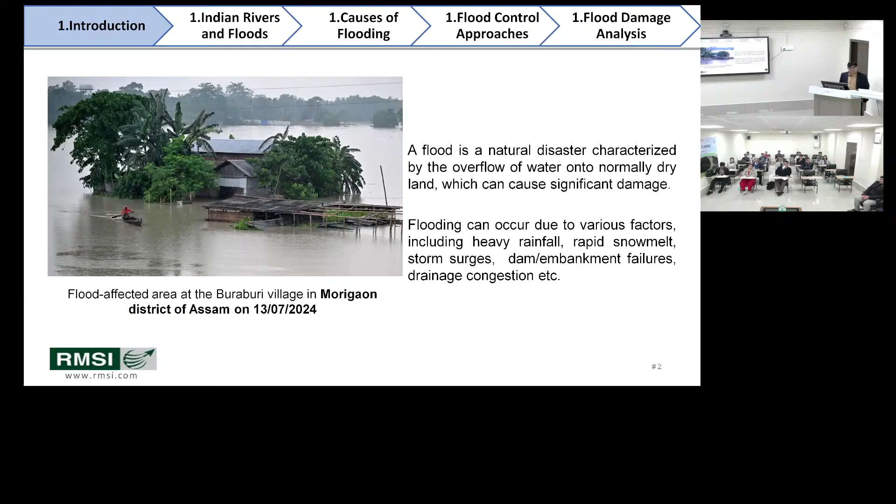We have completed one project in the Kopili River Basin, a left bank tributary of the Brahmaputra River. I have seen the downstream districts which are almost 100% flood impacted almost every year; in 2022, 2023, 2024 and last year also the basin has witnessed flooding at a lot of places. So there are several reasons why the flood is happening. I will cover all these reasons one by one and the measures we can adopt to mitigate those flood issues.

You can see some images of recent years. In May 2025, I also suffered in this flooding event in Guwahati. The entire Guwahati city was flooded. Most of the prime locations of Guwahati city were flooded for 2-3 days continuously. There was a heavy downpour of rainfall.

The major highways, like the highway connecting the airport to the main city center, were obstructed by the floods, and a lot of places like central Guwahati, Hatigaon, and Basistha had a lot of flooding. This keeps happening because of reasons like heavy rainfall as well as drainage congestion in the city, encroachment at many places, and debris within the local nalas in the city. So these are the main causes of city level flooding.

For the Brahmaputra river and other tributaries, there are other reasons of flooding like upstream runoff. If a higher amount of rainfall is happening in upstream catchments, it generates a high amount of runoff, and it's creating huge flooding scenarios in the downstream part of the basin.

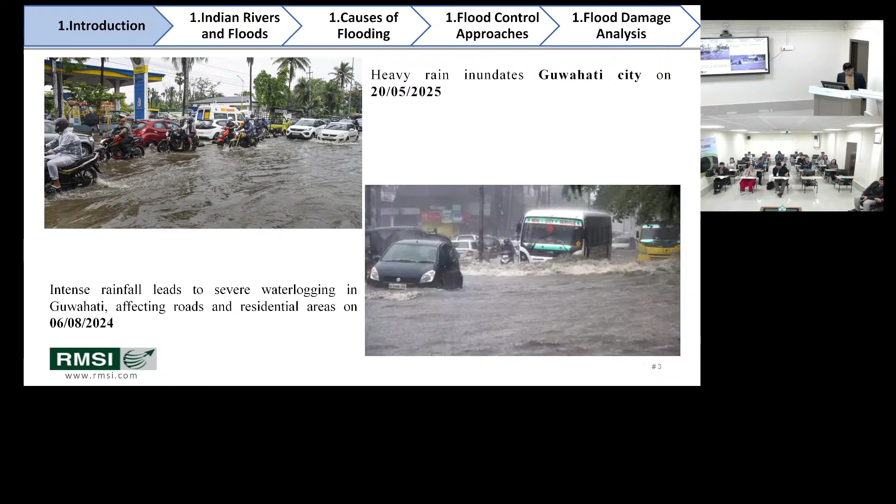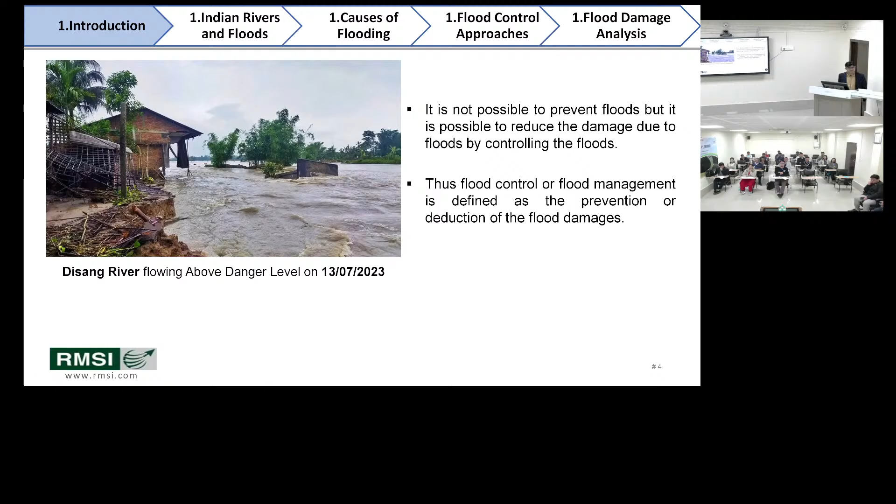So Silchar, Guwahati, then Nagaon, Morigaon, and Golaghat. These are a few places. Dibrugarh is a town situated near the Brahmaputra bank. So these are a few towns in Assam and the northeast region which are witnessing flood kind of situations almost every year or in alternate years.

So in India there are a number of river basins. The Central Water Commission has classified around 22 river basins of India. Major river basins are Brahmaputra, Ganga, Krishna, Godavari, and Kaveri. Some of them drain water into the Bay of Bengal, some into the Arabian Sea. The major two river systems, the Ganga and Brahmaputra river system, drain water into the Bay of Bengal.

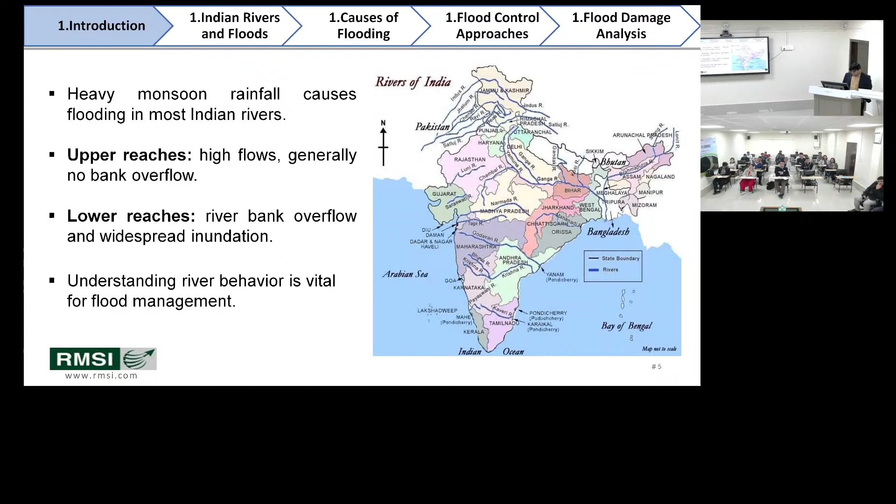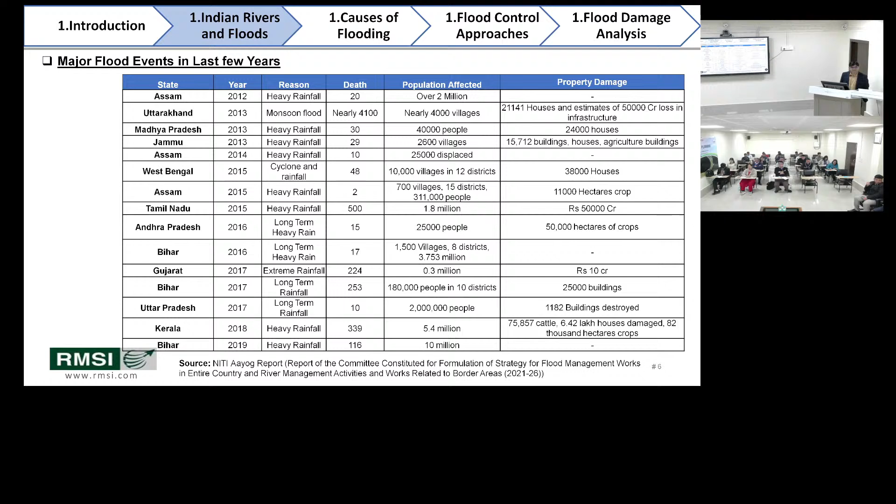So agencies like the state disaster management authorities and the National Disaster Management Authority, NDMA, are conducting studies on the flood affected areas and major losses, and post flood evaluation of the damage caused, and you can see the data say the damages are increasing year by year. We are implementing a lot of mitigation measures, structural as well as non-structural, which I will be covering in the next slides. But still the problem is increasing year by year as far as the Ganges and Brahmaputra rivers are concerned. Bihar, Uttar Pradesh, and Assam are the states highly affected by flooding in these years.

The major cause of flood is the rainfall. India Meteorological Department has classified the rainfall into different categories. In your mobile phone, from the regional Met Center in Guwahati, the regional office of IMD, you might be receiving notifications that the Met Department is forecasting heavy rainfall, moderate rainfall, or very heavy rainfall in your region, locality.

So how have they classified these magnitudes, heavy, very heavy, extremely heavy rainfall? They have classified depending upon the magnitude of 24-hour accumulated rainfall. If the 24-hour accumulated rainfall is greater than 64.5 mm, then it's called heavy rainfall. If the magnitude is 115.6 up to 205, then it's called very heavy rainfall. And it is extremely heavy rainfall if the daily accumulated rainfall is greater than 205 mm.

So likewise they have classified the rainfall depending upon their magnitude, 24-hour accumulated rainfall, because the Met Department has observatories and RTDAS, and they have forecasting mechanisms like GFS and WRF, so they can predict which area is going to witness what amount of rainfall. So they are sending alerts with the meteorological forecast.

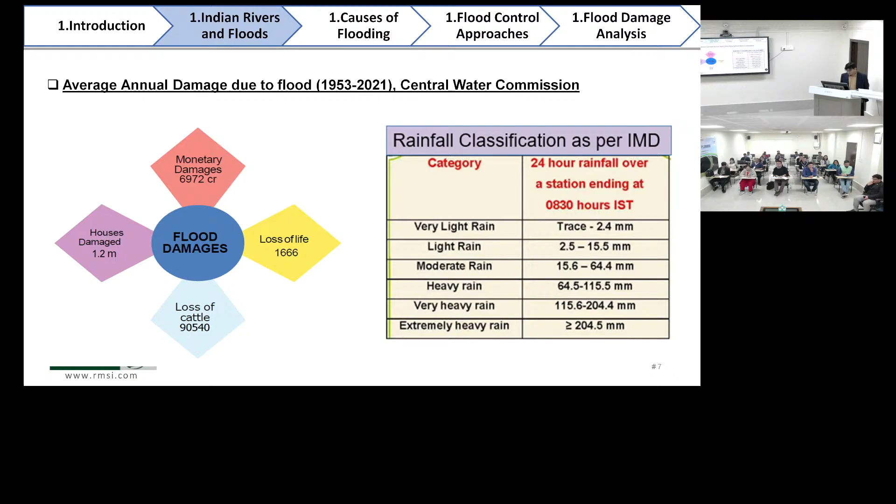There are some districts, as I mentioned, Morigaon, Nagaon, which are near the confluence of the major river system and tributaries. The Brahmaputra has a lot of North Bank and South Bank tributaries. Wherever there is a confluence, flooding is the major problem, apart from the upper reaches. The reason is that whenever the tributaries meet the main Brahmaputra river, there is backflow, the carrying capacity of the channel, and embankment breaches also happen near these.

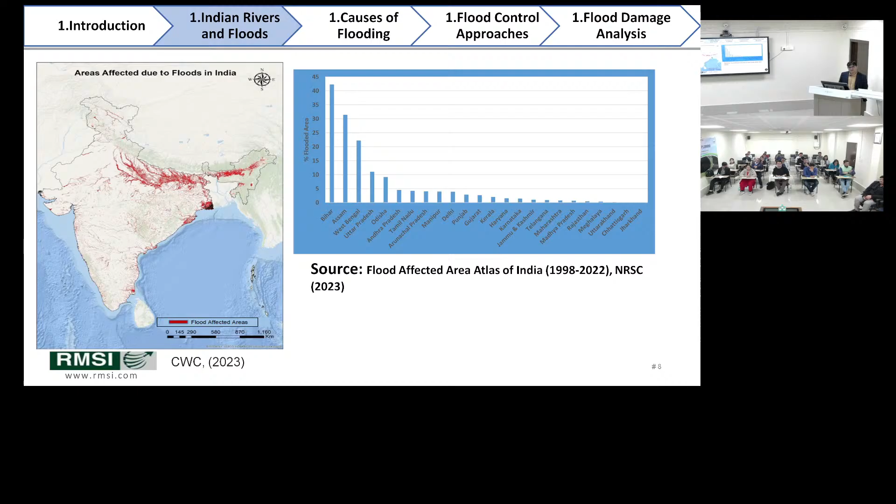I'll show you the map of the Brahmaputra showing the flood affected states and the districts in Assam and other states. Near the main river system, most of the area is prone to flooding, all along the north bank as well as the south bank tributaries.

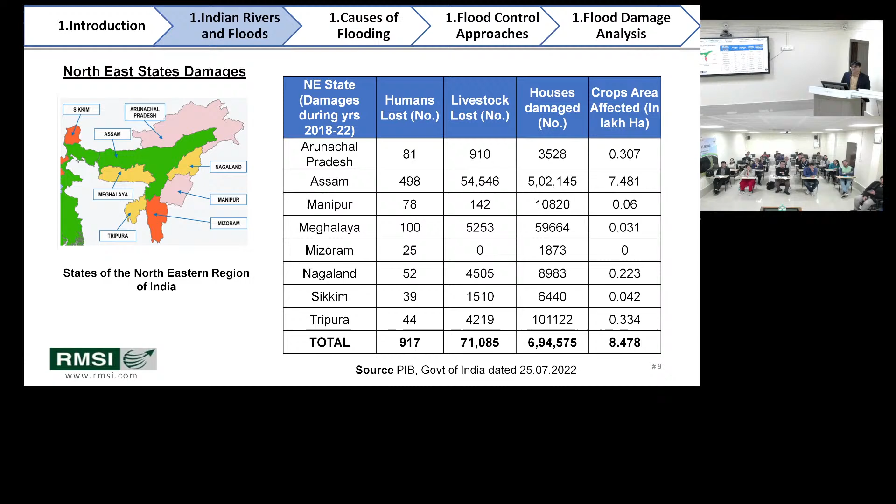So these are the 8 northeast states, and if you talk about the damages over the last 4 or 5 years, from 2018 to 22, these are the statistics. Assam is the most highly flood affected state in terms of house damages, livestock lost, human loss, and crop area and agricultural fields affected. The major flood affected state in the northeast is Assam.

Specifically for Assam, because this is the most flood affected state in the northeast region, agencies like the Assam Disaster Management Authority, in association with the National Remote Sensing Centre, are carrying out studies. In 2025 they published a report, and the NRSC considered satellite imageries for the last 26 years, from 1998 to 2023.

They have done a satellite based assessment, then categorized the districts based on their assessment. They considered which locations in the districts are witnessing recurring flooding, the places where almost every year or on alternate years there are flood problems. So they have associated a rank for this: the higher the occurrences, the higher the rank.

Apart from this, what is the flood affected area of the district? Is it greater than 40%? They have classified the range. If it is 0 to 10%, they assigned one value, then 11 to 20, then 2, 3, 4, 5. If the flood affected area of the district is from 91 to 100, when all 100% area is affected, they have given the rank 10.

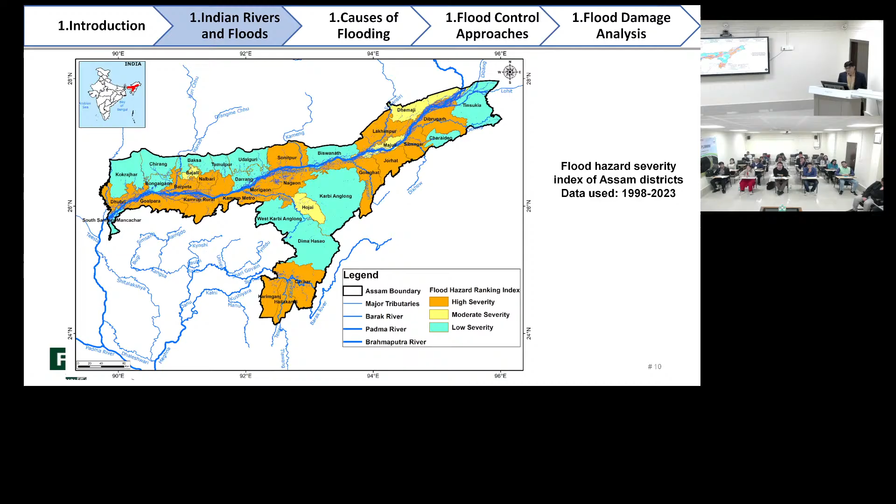So likewise they have classified depending upon the occurrences of flooding, the water level occurrences at the particular site, and the flood affected area of the district. IIT Guwahati also contributed to this study, and the Chief Minister Office, Secretary Office published this report last year in May 2025. Some of you might already be aware of this document, how they have classified and categorized the Northeast river basins.

Apart from the Brahmaputra and Assam, there are some incidents happening, like in Silchar in 2022. The entire town was flooded. The reason? Heavy rainfall. A flash flood kind of situation was there, and these incidents are happening in many places, many cities, many agriculture fields in the upstream part. The authorities are reporting these incidents: with a high amount of rainfall in a short duration, they are witnessing floods in the downstream part of the basin, our town, our locality.

So these are the reasons, like the intensity of rainfall. I have already discussed how the intensity of rainfall is classified by the Met Department. The India Meteorological Department has regional offices; here the regional office is near the airport, the Guwahati Met Center. During the monsoon season you might be receiving their notifications on your mobile phone, depending upon which locality you are residing in, saying these areas will be receiving heavy rainfall. So this is one cause, heavy rainfall in the upstream catchment.

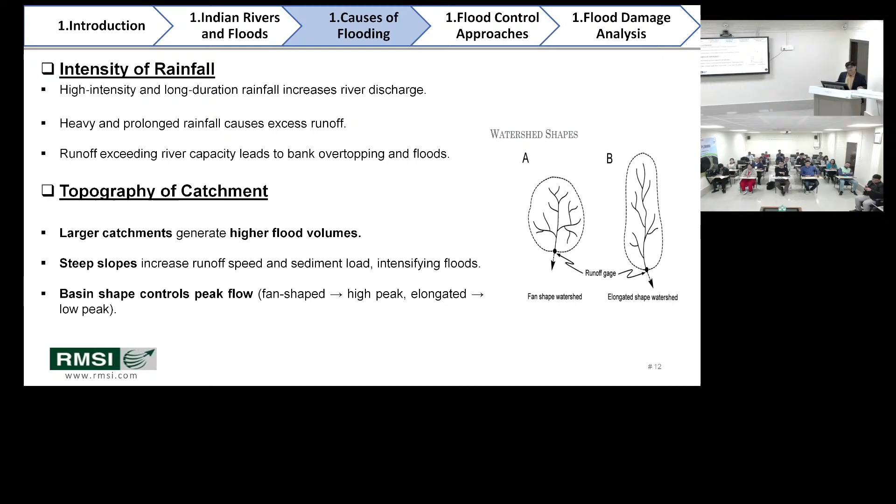So the lower part will contribute first, and then the upper catchment will contribute after some time, depending upon their travel time. So once the contribution comes from the upper catchment, the contribution of the lower catchment has already receded, the effect is already gone. So this is how the shape of the catchment plays a role while accumulating the flood and generating the peak flood at a particular location near the outlet of the catchment.

As I mentioned, sedimentation: reservoir sediment, river deposition, and erosion and deposition. These are the phenomena of the river. Like Brahmaputra, this is the major characteristic of the Brahmaputra. There are some localities where erosion is always happening, and some localities where deposition is happening. And in the reservoir locations, the deposition happens. So it also reduces the capacity of the reservoir.

So during the flood, the role of the reservoir is, I mean, most of the reservoirs in the northeast states are run of the river. There is not much storage capacity. The prime objective is to generate electricity. But there are some reservoirs whose purpose, like lower Subansiri, is to control the flood. Considering the storage structure, the volume, the reservoir capacity, the objective is how you can reduce the flood.

During the peak season, if there are huge inflows from the upstream side, then you can store them in your reservoir. But because of the sediment deposition in the reservoir, you cannot hold water beyond a certain limit. So this is also causing aggrading properties of the river, which also reduces this capacity, and bank overtopping, as I mentioned. Because of these reasons, the banks are overtopping, the embankments are breaching, which are creating flood.

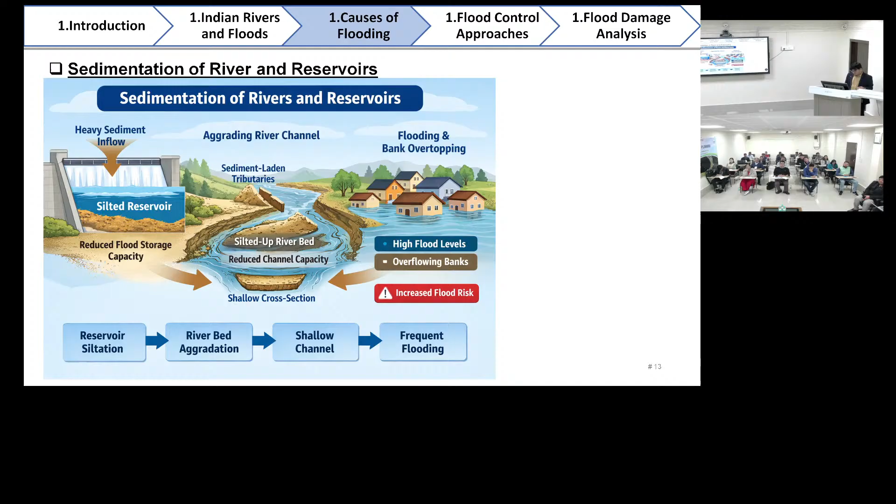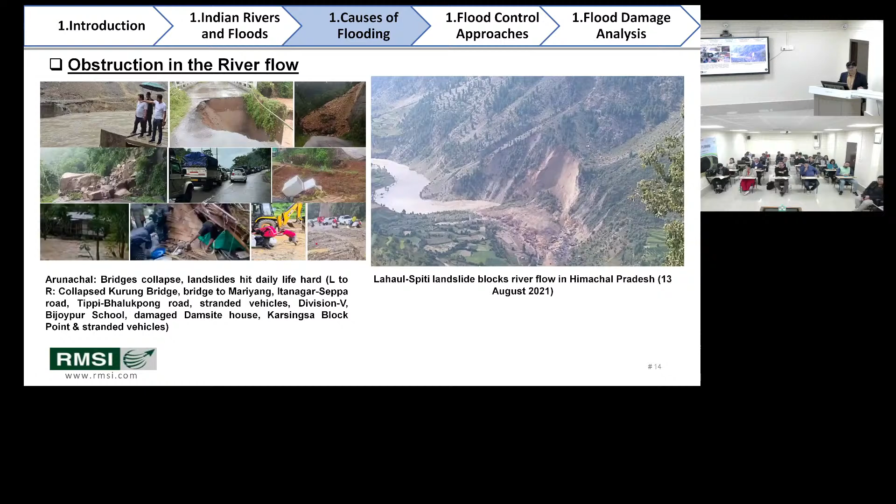And there are some other reasons like encroachment of the riverbed, river bank, and floodplain area, and then collapse of bridges. A few examples from Arunachal are there. Because of some reasons, the whole region has congestion and obstruction in the channel corridor. So these are some reasons.

And near the culverts and bridges, at most of the places you might have seen some long wood or tree wood or mixed debris, tree branches, whatever obstructions are there, they are also creating problems. I have seen in Kopili Basin, when you are crossing the river, most of the places have culverts, and for the small rivers the water is passing through circular or rectangular culverts. So the culverts are blocked by debris, trees, woods. So they are also creating flooding problems in the upstream region.

I have seen this incident in Itanagar as well, downstream of Doimukh, where some tributaries, I forgot the names of the channels, are crossing one bridge. I have seen a similar incident where the river path has been blocked by wooden blocks or debris. So they are creating problems because communities are living near the low-lying area. So these things are creating flooding problems.

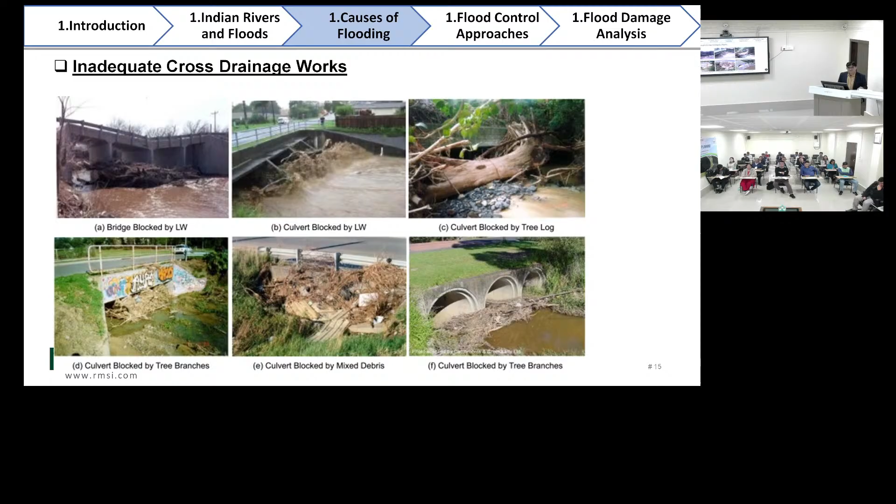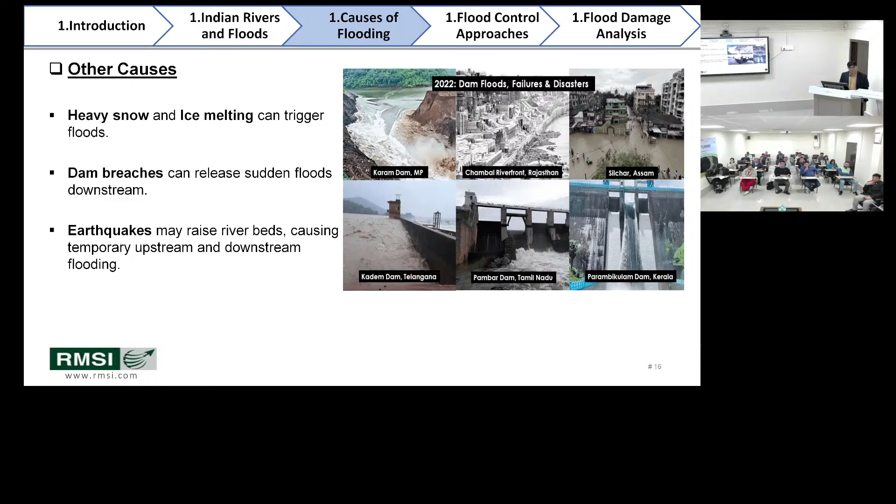And Silchar, if anyone from you belongs to this Barak region, you might have seen in 2022 what was the situation in Silchar because of the extreme rainfall in this area. And the Kadem Dam in Telangana, the Pambar Dam in Tamil Nadu, one gate was damaged. So the authority was unable to hold the water in this barrage, and it again created the flooding problem. So these are some examples.

Now we have discussed what is the flood, what is the rainfall, water level, how the warnings are being disseminated by authorities, types of floods, and causes of floods. But what are the measures? How can we control the flooding? There are some measures, and authorities have been implementing those measures. There are two broad categories. The structural measures: in your department, mostly you are measuring or controlling the flood using the structural measures.

Constructing a levee, constructing an embankment, some storage structures, the diversion, then detention basins, and then river training. All these structural measures, I hope your department one way or another is aware of. Your department is taking care of these structural measures in your basin to reduce the flood. Okay, so dams and reservoirs to store the water. Though their purposes are different, you can use the reservoir or dam to control the flood and to divert the water.

If you have a high amount of water in the particular basin and you have a water diversion scheme, or a storage and diversion scheme there, then you can hold the water and divert it to the nearby area or nearby river, considering the volume of water generated in your basin, in your stream. So dams and reservoirs also play a good role in controlling the flood. Then embankments and levees, we already discussed.

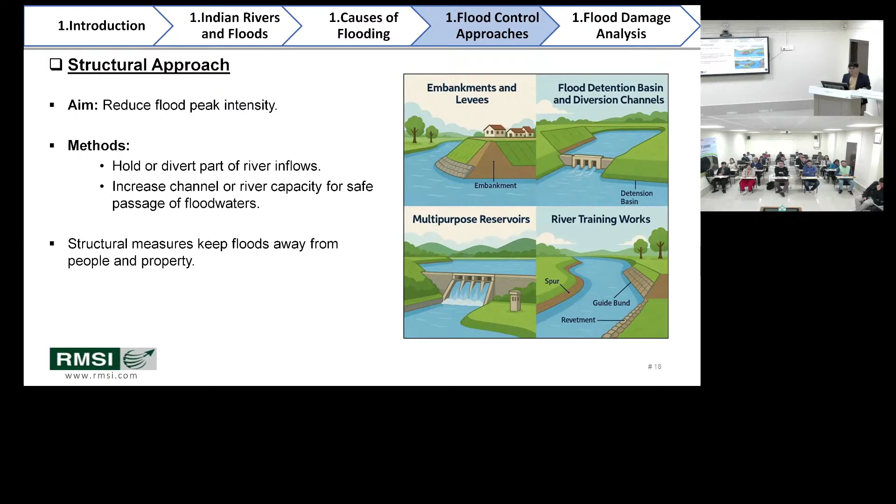Your departments might have already done this in your respective river basins. Detention basins, as I mentioned, oxbow lakes and lakes adjoining the river: where there is no connection between the lake or wetland and the river, you should create a connection so that during high flood events your detention basins or wetlands can accommodate some amount of flood, and the peak can be reduced to minimize losses downstream. So these are also options to reduce the flood.

Encroachment you can reduce, but this is not in your hands, and it is in nobody's hands, because encroachment affects all river basins in India, whether northeast, south, northern part, wherever, Delhi also.

I'm living in Delhi. You might have heard about the flooding in the Yamuna in the last few years. So there are some problems. In the nearby localities, on the TV channels you hear how many people are affected. The number of people is counted based on where they are living, where their houses are settled. So if your house is in the floodplain zone, then ultimately, after a few years, the river has to take its way.

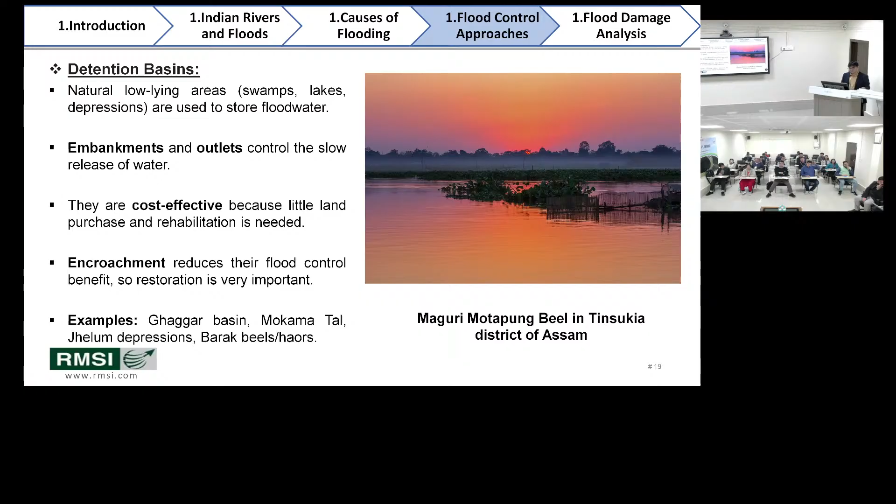So you have to think over those points where mitigation or protection measures are considered for these floods. Flood mitigation measures: embankments, there are different types, you're aware of those, the geobags, geotubes in some locations. Then RCC porcupines in the Morigaon district in Assam. Then some examples of protection with boulder spurs in Dibrugarh, Assam. These are some photographs. Then construction and upgrading of embankment river works along the Beki River, reducing flood and river bank erosion. Then bioengineering measures.

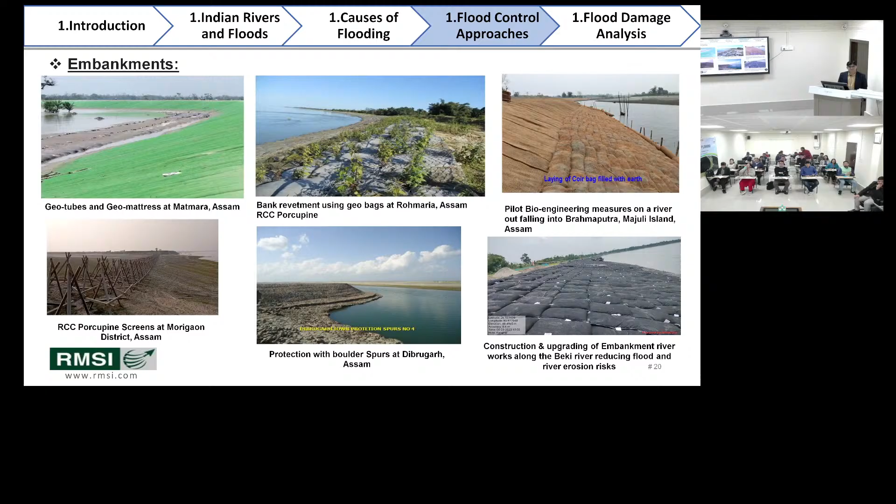There are some other measures too, like nature-based solutions. Nowadays there are also green solutions coming into the picture to reduce flooding as mitigation options. Channelization of the river, as I've discussed: see, this is a braided river, and all these obstructions you can remove. Then after the channelization, your river looks like this. So these are some options. Then gabion wall structures, then geobags. These are also some options to reduce the flood.

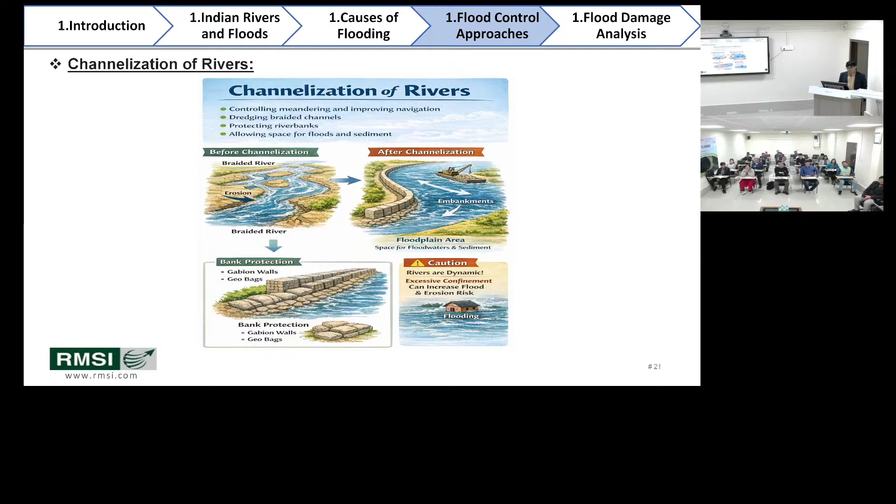Diversion of water, river interlinking. There are some projects in Arunachal. I have seen the Ranganadi, where the water is being diverted to another river. The purpose is to generate power as well as to reduce the flood, and to provide water for irrigation fields. So once you have a mechanism to divert the water, you can use it for multiple purposes: for irrigation, to reduce the flood, to transport water to water-scarce regions to provide domestic water supply. So there are multi-purpose uses.

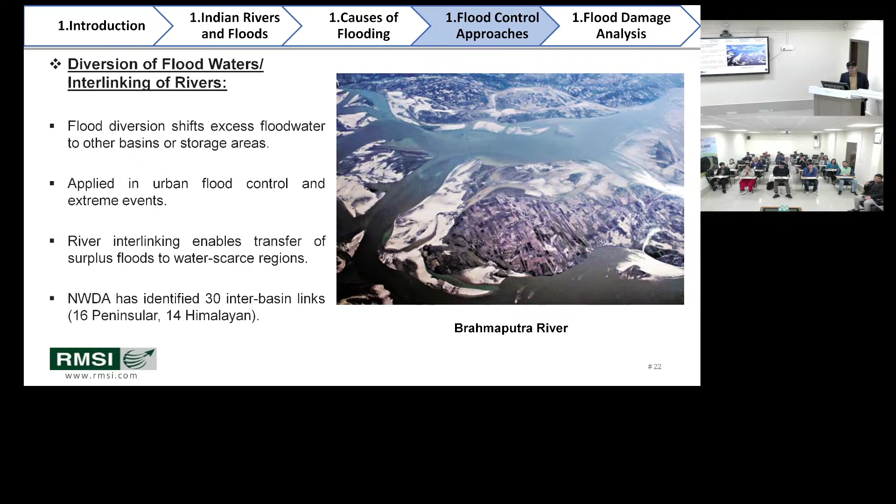Then watershed management, like local catchment area treatment. These measures are in the master plan; as I mentioned in my first lecture, we will be identifying basin-specific issues. Some basins may have a drinking water problem, a water quality problem, an ecological balance problem, or be landslide-prone basins, in the Arunachal part. So there are basin and locality problems, and we will be identifying those basins. Some examples we already showed in the last slides. Before formulating the master plan document, all these issues will be addressed, and along with the issues, feasible solutions will be recommended.

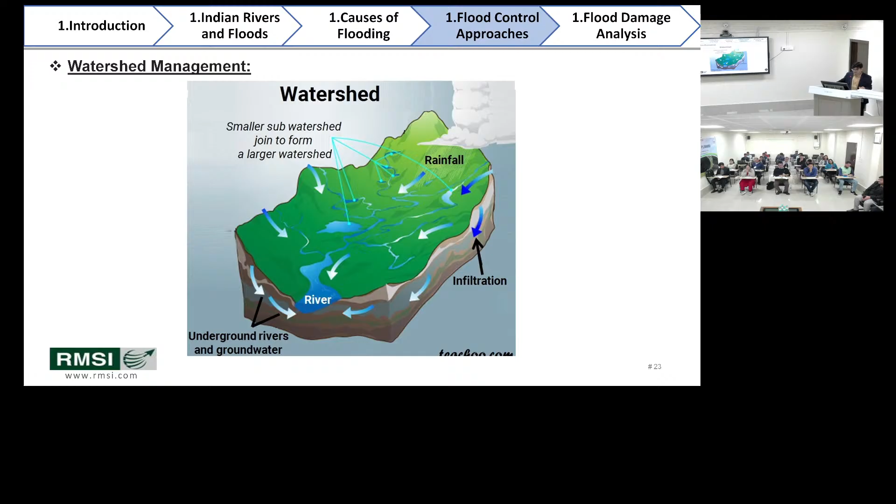So catchment area treatment is also one of them. You can stabilize the catchment using bunds to reduce erosion. You can build water harvesting structures to store water and reduce soil erosion, and to maintain ecology or fisheries. From an aquaculture point of view, you can increase fish production to enhance local livelihood in the region. So you can store some water depending upon feasible locations. Industrial waste is a major problem for water quality, so you can reduce the industrial waste. These kinds of basin-specific recommendations will be provided in the master plan.

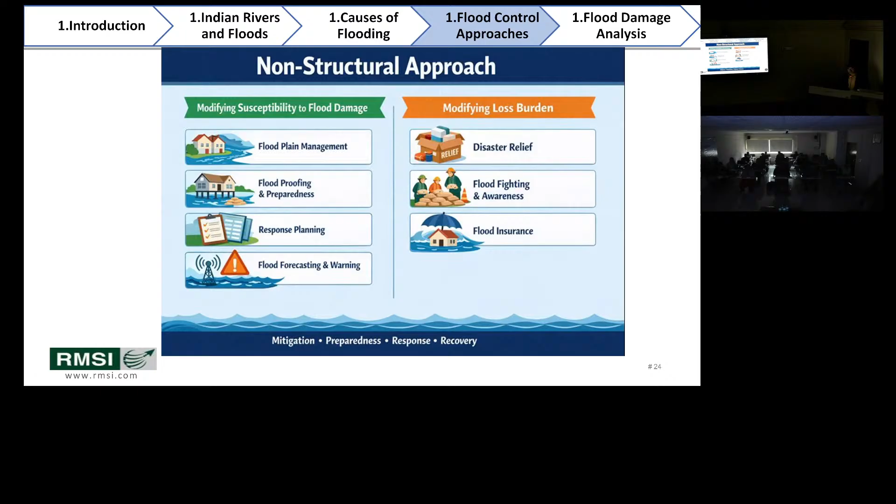Non-structural measures, as I mentioned: floodplain management, floodplain zoning, and disaster relief. The post-flood activities are flood fighting and awareness, flood insurance, disaster relief. But before the flood, you have flood proofing, preparedness, response, flood forecasting, warning, floodplain zoning. So this is the slide for flood forecasting.

How does this flood forecasting system work? You have rainfall forecasting, as I mentioned, from the Met Department: 3 days, 4 days, up to 7 days, even 15 days rainfall forecasts you can have. But the higher the lead time, the lower the accuracy. I can predict better for tomorrow, 24 hours; I cannot predict so accurately what will happen after 15 days. At least 24 hours ahead, the department can predict rainfall with better accuracy based on weather conditions and models. The Met agencies are doing this and issuing forecasts.

This is accurate. The earlier days there was no technology. Then if the Met Department issued the warning, okay, you take these measures because this amount of rainfall is going to happen in this region, then there was no rainfall. But nowadays, if the Met Department is predicting very heavy rainfall for some area, at least you get heavy rainfall in those regions. So the prediction is accurate nowadays.

So IMD is providing the rainfall forecast, and based on the rainfall forecast, we have the modeling system, which can take the input, the rainfall forecast, and then considering all those modeling parameters, we can predict, because mostly the flood is generated by the rainfall. The embankment breach we cannot predict, because the soil properties and their vulnerability come into the picture. But at least considering X magnitude of rainfall, you can predict what will be my runoff, considering the losses and all. So with the modeling system, we can issue the warning forecast.

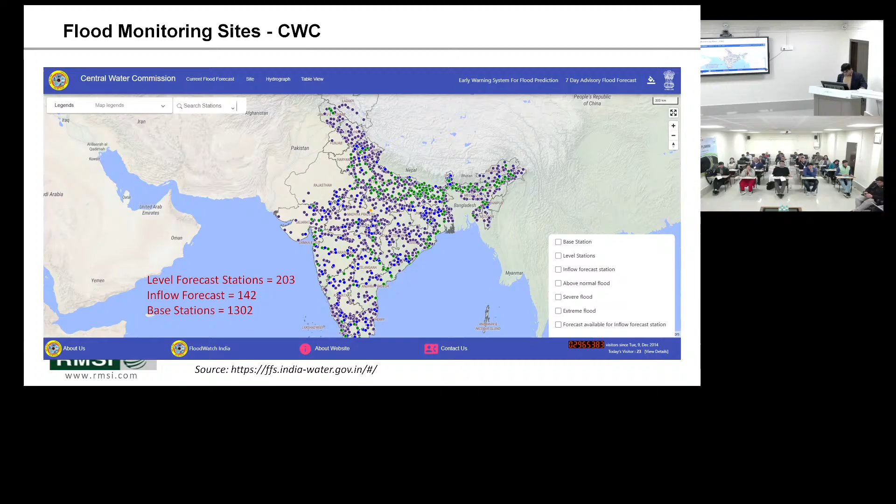This is the forecasting of one site on the Kopili River, Kampur, in Nagaon district. The Kopili is the south bank tributary of Brahmaputra. So you can see there are 3 lines. Yellow line is warning level. What is the level? 59.5 meter. Then orange level 60.5 meter, and 61.79 is the highest observed flood level there.

So from May 12 there was a normal flooding situation till May 13. Now on May 13 the water level crossed warning level, the next day it crossed danger level, then on the 15th extreme flood level was there, it crossed the HFL.

So an agency like Central Water Commission, before issuing the flood bulletin, uses this method. Your water level is above the yellow line, which is the warning level, yellow alert. Water level crosses the danger level, orange alert. Water level crosses the HFL level, then red alert. Okay, so red alert is once your water level crosses above the HFL, extreme flood situation.

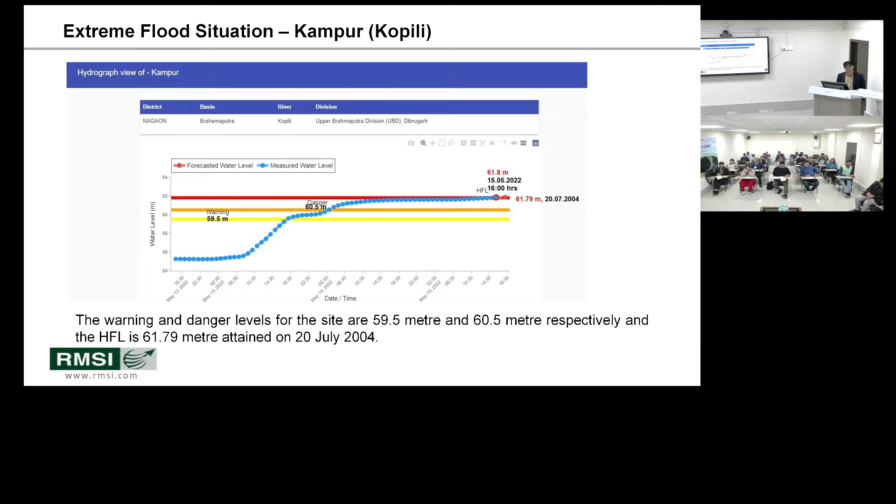So similarly, the departments, the state agencies, disaster management authorities are also considering the same approach for how they issue the water level forecasting. In Northeast, these are the sites. Inflow forecast, reservoir locations: you have a reservoir location, then CWC provides the information on what would be the inflow. Inflow means what would be the contribution from the upstream catchment at your particular site.

And level forecasting means we are providing only the level forecast, what would be the level for the next 24 hours. Then level monitoring, you are not providing any forecasting, but you are simply monitoring the levels. Like the conventional method, as I mentioned, from the level monitoring site, you can predict forecasting for a downstream site. But at that particular base station, you are only monitoring the level. You are not providing any forecasting.

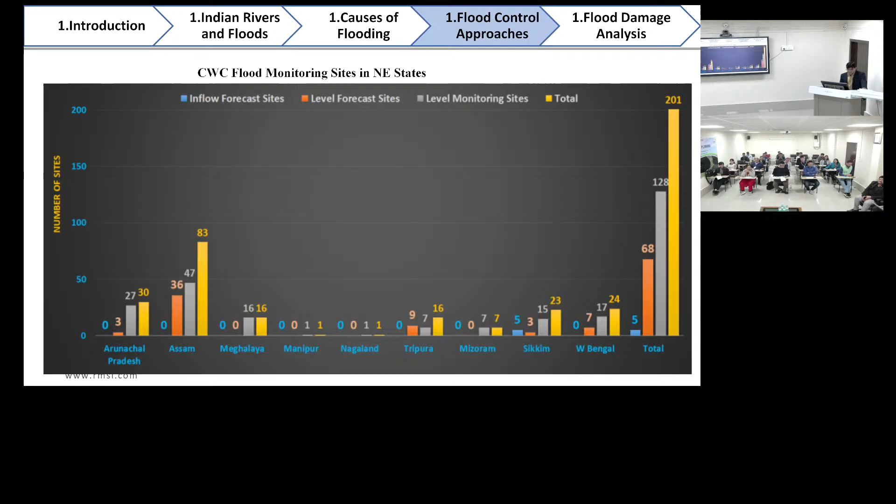So you see, Assam has the highest share, 83 total sites, 47 level monitoring sites, 36 forecasting sites. It considers all these tributaries, Brahmaputra and all. Nagaland has only one site. I forget Nagaland, I think Dhansiri, no, on Dhansiri there is no site, but there is one site in Nagaland, one site in Manipur, and there are a number of sites in Meghalaya. Central Water Commission and the states are also maintaining some sites.

If I am saying that at a particular river channel outlet my 25-year flood is 5,000 cubic, it means the probability of this flood happening is once in 25 years. Out of 25 years, once it can happen. This is the probability. So NDMA guidelines are saying that your establishment should follow these floodplain guidelines.

So while you are developing the floodplain zoning, if you define the floodplain zoning, then you have to prepare 3 maps. One is the 2-year return period flood map, then the 25-year return period flood map, and then the 100-year return period flood map. So categories are there, 1, 2, 3. Class 3 is 2 years, second is 25 years, first class is 100 years.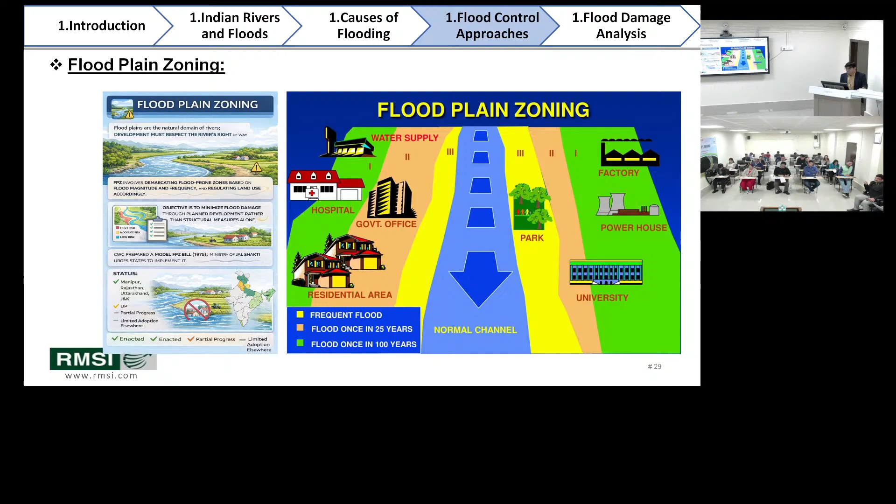Implementation also they have done. Like UP, I have seen them remove some settlements because their properties were falling in zone 2, zone 3 or the river channel. So implementation also to some extent they have done, but it is not so easy. The challenge is always there. Okay, so these are some challenges. You are already aware of them, so I will not discuss them here. So reservoir operation, like flood control reservoirs, can be used, as I already discussed.

Then, application of space technologies: remote sensing and satellite imagery. From the satellite imagery, you can see what is the flooding area in the basin. You can estimate, and you can do change detection also. As one of my fellows briefed you, you have imagery for a number of years, so you can see what changes are occurring over the years from the imageries.

Like forest area is decreasing, settlement is increasing, flood prone area is increasing, or your sediment erosion is increasing, or different kinds of land use planning, you can see over the years what changes are happening in my basin. So my fellow Mr. Nitish will show you the case study of Dikrong, how things are changing there, from the satellite imagery point of view and from the ground information, as far as land use regulation or planning is concerned.

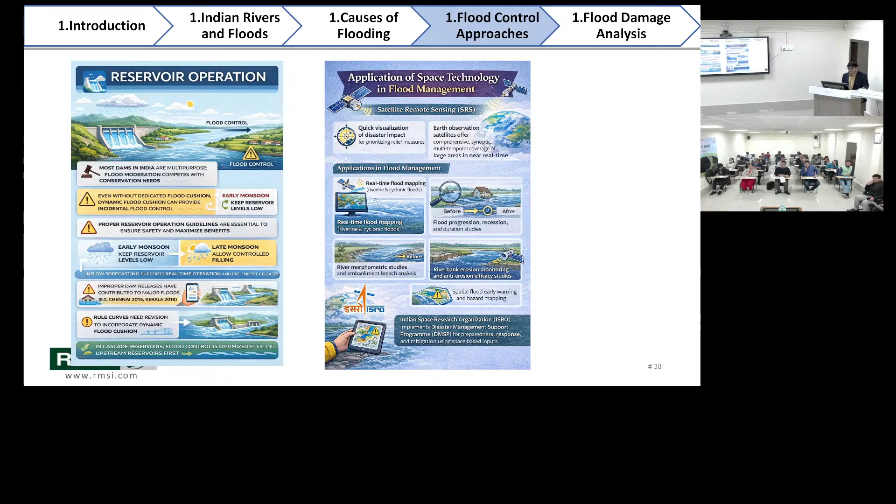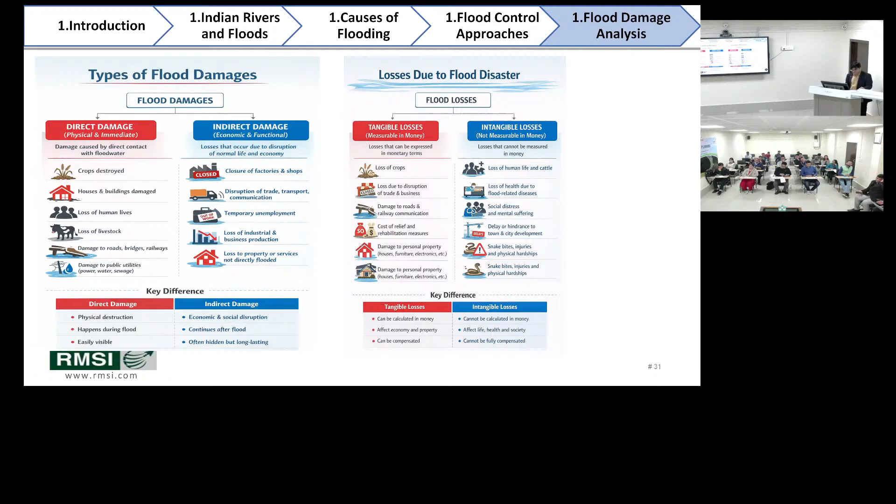So there is one category of damages. I am not going to take much time here because you are already aware that some are direct damages, some indirect damages, tangible losses, intangible losses. So I will not speak much on this slide. And this is all about flood management, the mitigation measures, the agencies, and what the states are doing. If you have any query or doubt, we can discuss right now, and after the session as well.

Yes. Yes. Very good question. Yes. Yeah, very good question. Thank you for this.

So my answer: when we are recommending some schemes, we will classify them as long term, short term, and medium term, depending upon their category. If it is a local specific issue like water quality, water diversion, embankment, or creating some storage structures, then depending upon the type of recommendation in the master plan, there will be a plan valid up to 2 or 3 years only. A short term plan, then a mid term plan, then a long term plan which will last up to 15, 20 years.